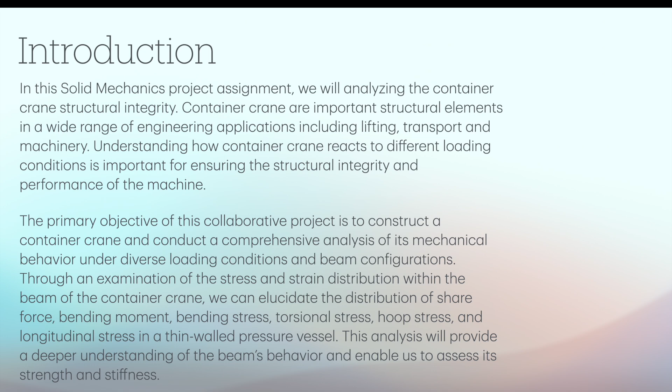Now I will start our group presentation with our introduction. In this solid mechanics project assignment, we analyze the container crane structure integrity. Container cranes are important structural elements in a wide range of engineering applications, including lifting, transport, and machinery. Understanding how the container crane reacts to different loading conditions is important in ensuring the structural integrity and performance of the machine.

The primary objective of this collaborative project is to construct the container crane and conduct a comprehensive analysis of its mechanical behavior under various loading conditions and beam configurations. Through an examination of the stress and strain distribution within the beam of the container crane, we can conclude the distribution of the shear force, bending moment, bending stress, torsional stress, and hoop stress and longitudinal stress in a thin wall pressure vessel. This analysis will provide a deeper understanding of the beam behavior and enable us to assess its strength and stiffness.

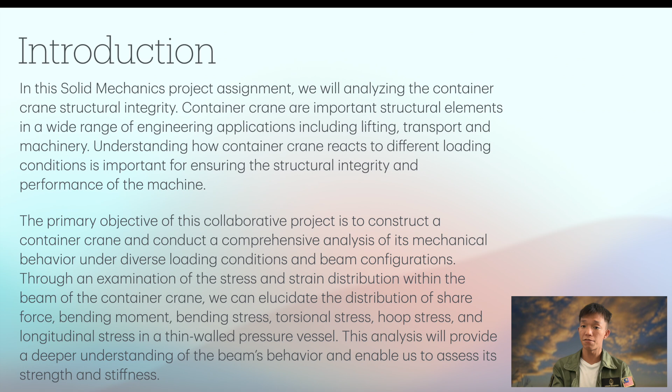Now I will talk about the objective of our group project, that is to calculate the stress and strain of the container crane beam, calculate shear force and bending moment, calculate bending stress, and calculate torsional stress. Also, last but not least, calculate hoop stress and longitudinal stress in a thin wall pressure vessel on the container crane.

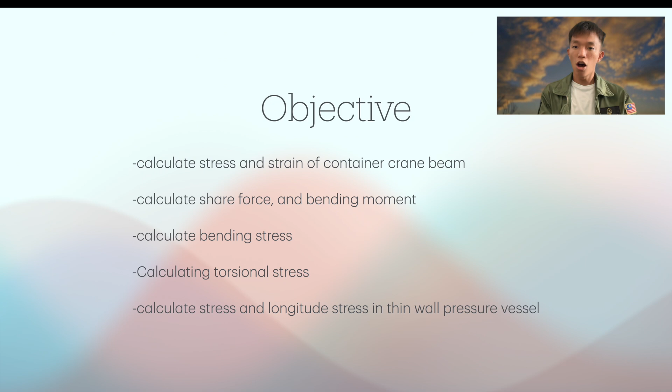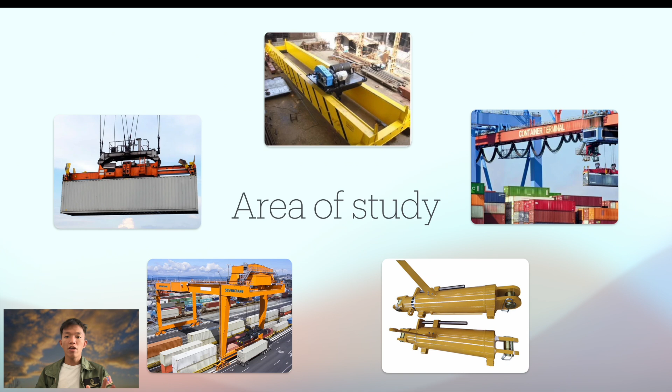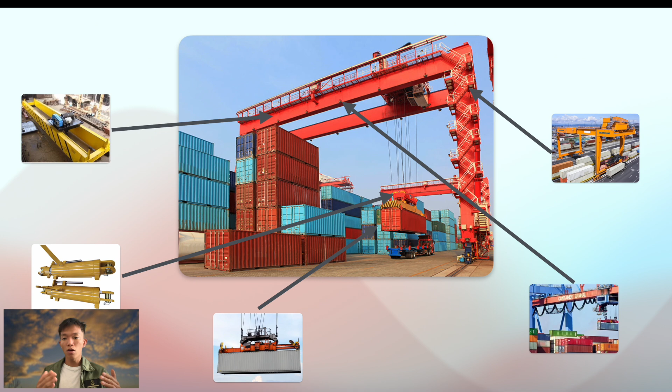So these are the areas of study of the container crane that we are going to study. We have where the longitudinal stress and hoop stress is going to be calculated, the bending stress, the torsional stress, and also the bending moment. All of these are the places that we are going to calculate and study on the container crane.

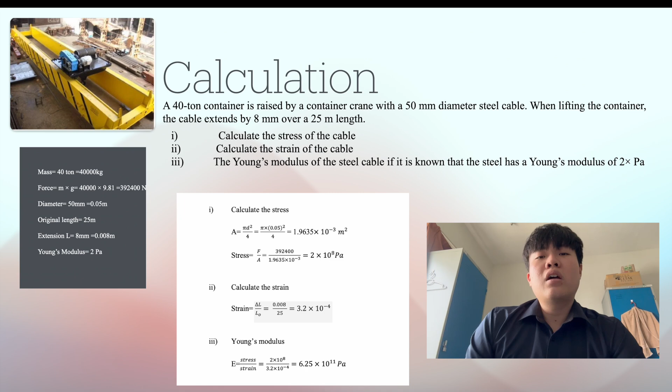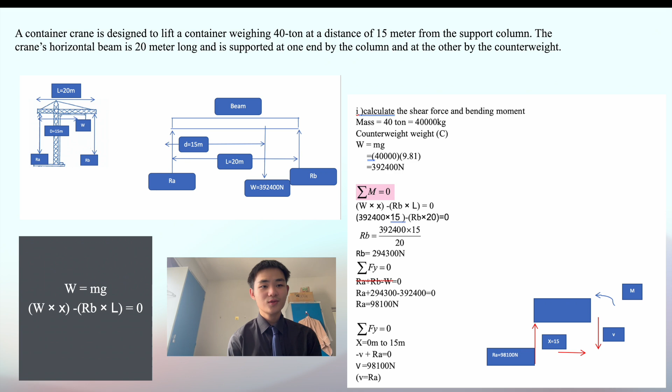Then we also use total Fy equal to 0 to find V from X equal to 0 meter to 15 meter. So V is equal to 98100 Newton because V is constant with Ra. Then from X equal to 15 meter, V is negative 294300 Newton, and from 15 meter to 20 meter, X is equal to 5 meter and V we get is 0 Newton. So from the moment, at X equal to 0, the moment is equal to 0 Newton meter. From 0 meter to 15 meter, the moment we get is 1471500 Newton meter. From 15 meter to 20 meter, the moment we get is 0 Newton meter.

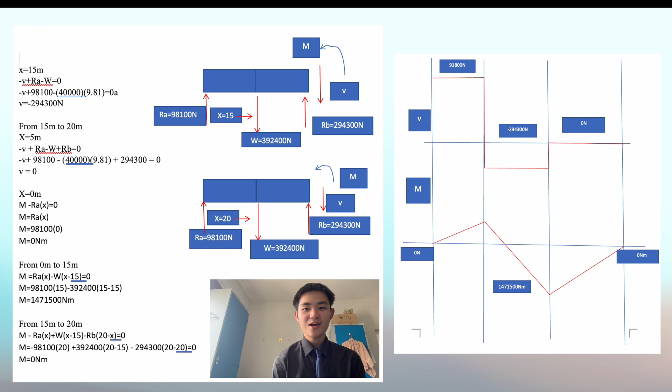So on my right hand side is the diagram of the shear force and the bending moment. Thank you.

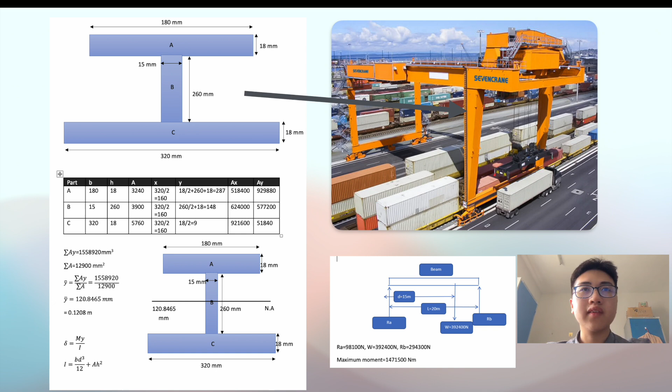And to calculate the inertia, we also use the table to calculate BD cubed over 12 and to calculate AH squared. We get the value of I equal to 0.02349

m to the power 4. And for y, we use the total height minus the neutral axis. We get 0.1752 m.

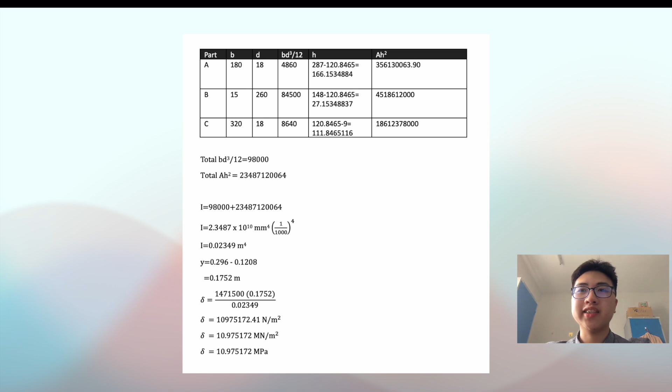And filling in all the values, we get our final answer as 10.975172 MPa. So thank you to our previous presenter, Arthur Ang.

Now I will present my part of the calculation on the container crane, which is calculating the torsional stress on the DC motor. Each container crane has two 650 horsepower DC motors running at 900 RPM with a shaft diameter of 0.8 meters.

Using the formula omega equals 2 pi over 60 times N, we can calculate omega. To find power, we first convert the horsepower, since 1 horsepower equals 0.7457 kilowatts, converting 650 horsepower into kilowatts.

Using the formula P equals torsion times omega, we can find the torsion. After finding torsion, using the formula tau max equals T times the radius of the shaft over J, we need to find J, which is equal to pi d to the power 4 over 32.

After finding J, we put everything into the torsional stress maximum formula and find that one motor powering the container crane runs at 51.17 Newton per meter squared. So if we multiply by 2, we get about 100 something Newton meter squared for the 2 motors of the container crane.

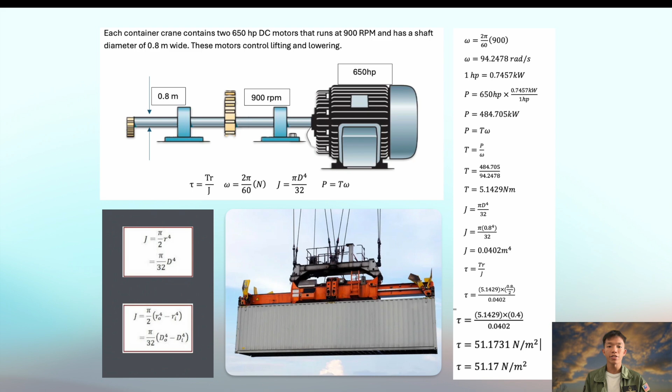The question is: a thin wall cylindrical pressure vessel used in a hydraulic system has a wall thickness t equal to 4 mm and diameter 25 cm. The vessel is subjected to an internal pressure P equal to 5.5 MPa. Calculate the longitudinal and hoop stresses in the thin wall. You can look for the solution, there's a figure of the question.

We use the formula stress equals PR over 2T to find the longitudinal stress. We find the radius from the diameter over 2, getting 12.5 cm for radius, which we convert to meters to get 0.125 m. We also convert the thickness from millimeters to meters to get 4 times 10 to the power negative 3 meters. Then we put the values into the formula and get the longitudinal stress of 85.94 MPa.

Next we find the hoop stress using the formula stress equals PR over T. Putting the values into the formula, we get the final answer for the hoop stress as 171.88 MPa. Thank you.

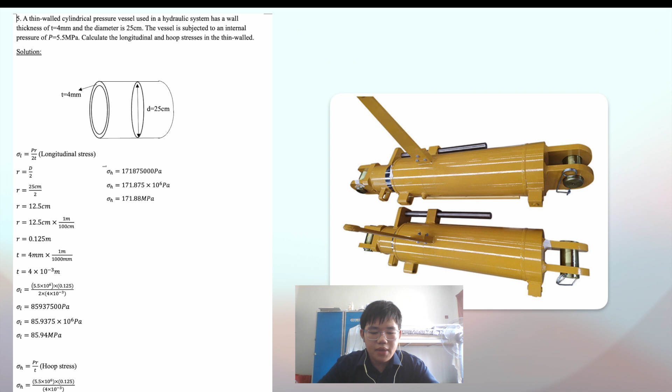Now, finally, I will talk about the conclusion to our mini project. Through this mini project on the container crane, we gained valuable insight into its behavior and efficiency under various loading scenarios. The main components of our finalized conclusion are: this experiment effectively demonstrates the strain of the container crane beam under various loads.

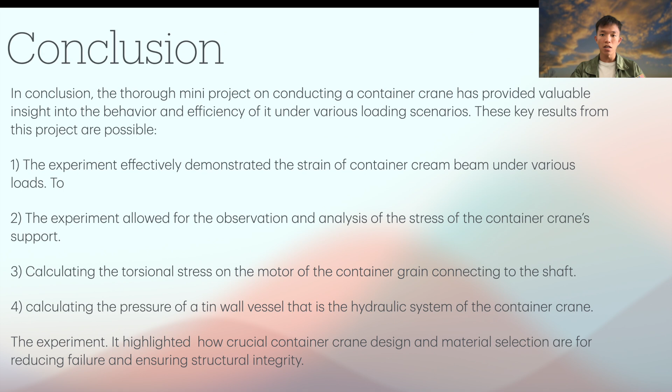The experiment allows us to observe and analyze the stress of the container crane supporting an object, calculating the torsional stress on the motor, and finally calculating the pressure of a thin wall vessel in a hydraulic system of the container crane. That is our group presentation.